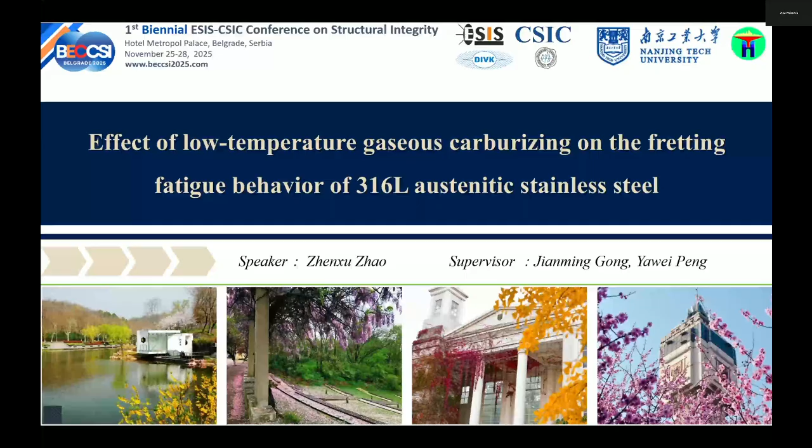Okay. Alright, please. Okay.

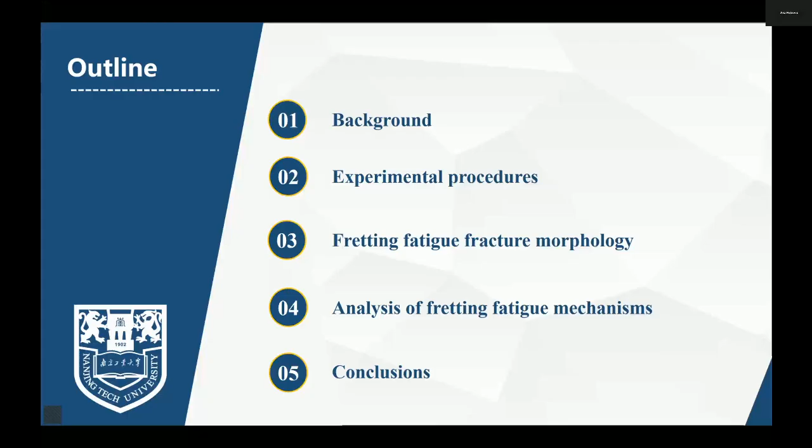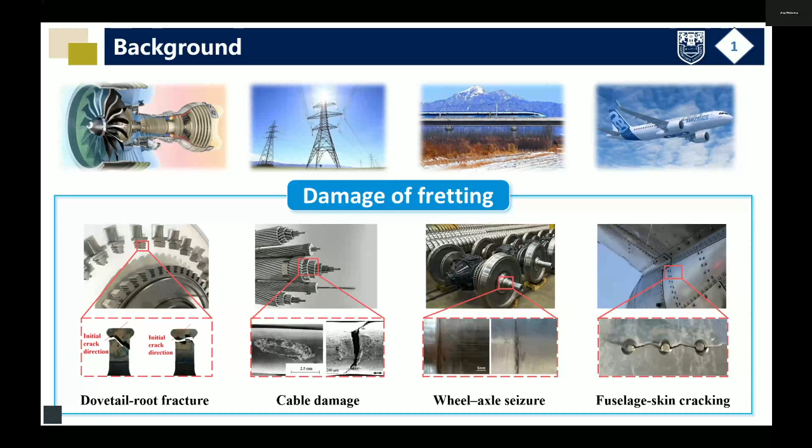Fretting is everywhere in our daily life and industrial production, such as in gas turbines, power cables, trains, and airplanes. Although the displacements are very tiny in fretting, the combination of contact pressure and repeated microsliding promotes severe surface wear, crack initiation, and even early failure. As shown here, fretting can lead to fracture, cable damage, wheel-axle seizure, and fuselage skin cracking. So, fretting damage is often described as the cancer of industry.

Fretting fatigue, as a typical form of fretting damage, is characterized by very small relative displacements, high concealment, and yet extremely severe consequences once cracks initiate. Fretting can shorten the fatigue life by more than 70% at the same stress level and reduce the fatigue limit by over 30%.

316L stainless steel is widely used because of many advantages, such as excellent corrosion resistance, high toughness, and so on. But its low surface hardness and low fatigue limit give it poor fretting fatigue performance. So, optimal surface hardening techniques are essential for enhancing the fretting fatigue of 316L stainless steel.

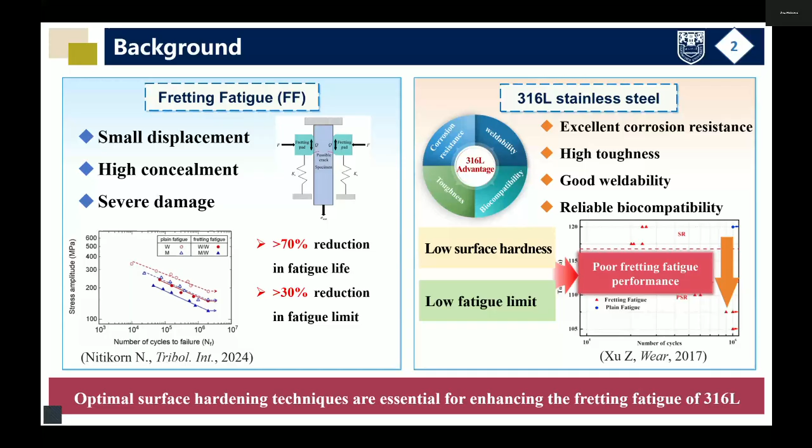Surface hardening techniques are usually divided into surface mechanical treatment and surface thermochemical treatment. However, surface mechanical treatments are difficult to apply to complex structures. High temperature thermochemical treatment can form carbides, which decrease the corrosion resistance of stainless steel. So among these, low temperature gaseous carburizing can improve corrosion resistance, increase surface hardness, and enhance the fatigue limit of 316L. So, the fretting fatigue performance of 316L stainless steel after low temperature gaseous carburizing requires further investigation.

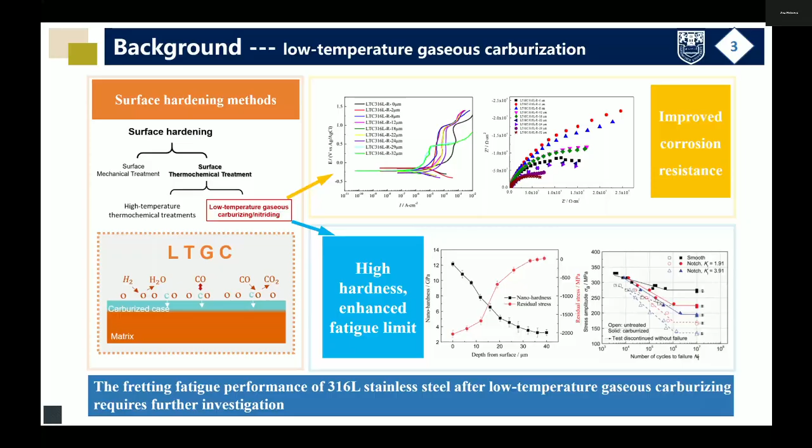This is the experimental procedure of my research. We carried out fretting fatigue tests using a bridge type fretting fatigue device. The normal contact stress was kept at 60 MPa. The loading frequency was 12 Hz, and the stress ratio was 0.1. Notably, the carburized samples were tested under the same conditions as the untreated ones.

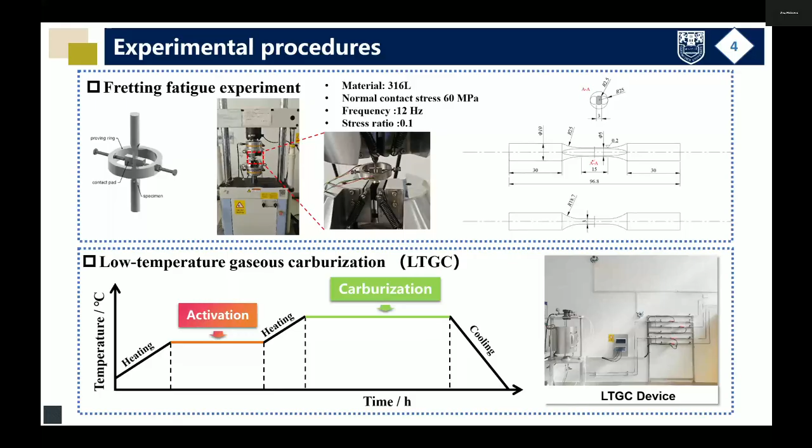The metallographic image shows that in the carburized sample, a uniform precipitate-free 30 micrometer hardened case forms on the surface. The hardness and carbon content show a gradient distribution, peaking at 12 GPa and 3.1 weight% respectively. Substantial compressive residual stress is introduced in the carburized sample, with 2.2 GPa on the surface.

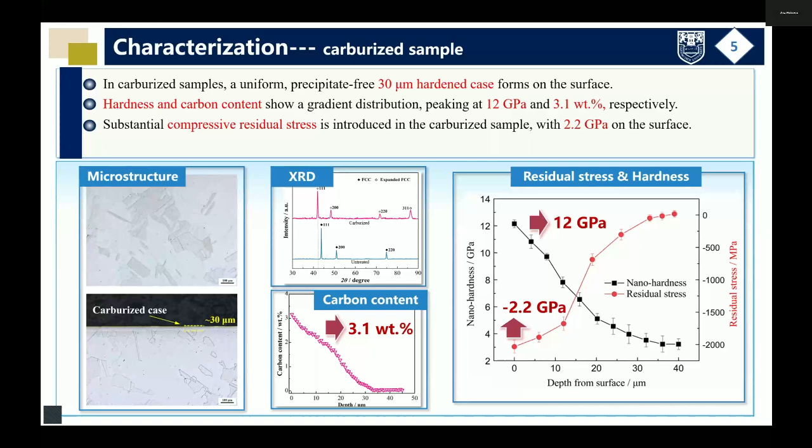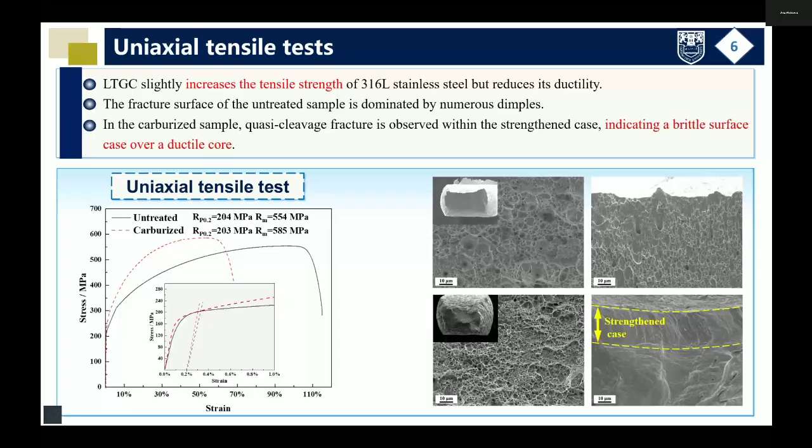Next, I will describe the results of the fretting fatigue test, starting with fretting fatigue life. The fretting fatigue limit of 316L stainless steel is 40% lower than its plain fatigue limit. LTGC leads to a 10% improvement in the fretting fatigue limit, and at high stress levels, it should be noted that carburized samples exhibit shorter fretting fatigue life than untreated samples. The cycles to failure graph on the right shows that with decreasing stress, the fretting fatigue life of carburized samples gradually recovers and eventually exceeds that of the untreated samples.

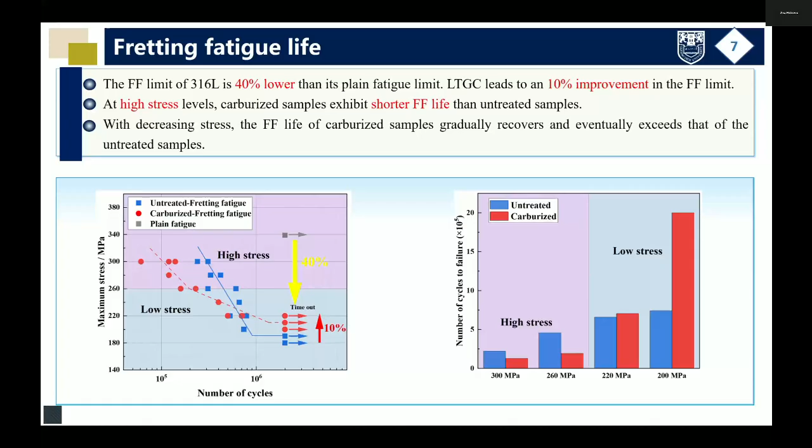Using SEM, we examined the fretting fatigue fracture morphology. All fretting fatigue fractures originated from the fretted surface of the sample. Fatigue fracture in the untreated sample initiates from the surface. In contrast, for carburized samples, as the stress decreases, crack initiation sites tend to shift from the surface to the subsurface.

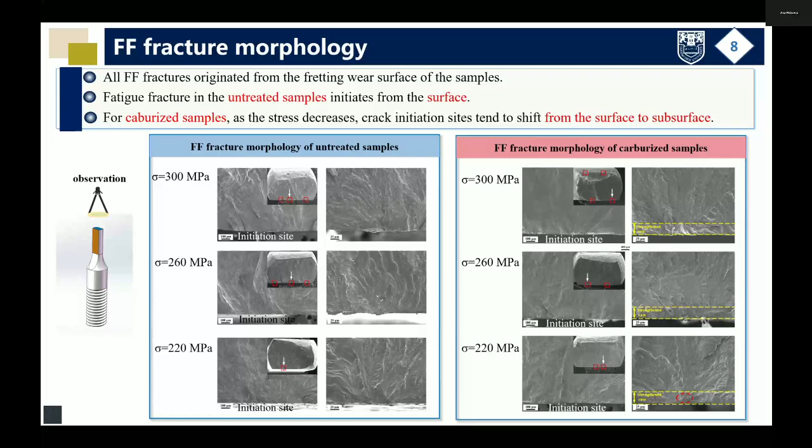Next, we examined the fretting wear surface by SEM and EDS. For the untreated samples, the surface shows severe damage. We can observe microcracks, ploughing, plastic deformation, and debris. In addition, EDS analysis indicates the presence of oxidative wear. So, the wear mechanism is governed by a combined action of abrasive, fatigue, and oxidative wear.

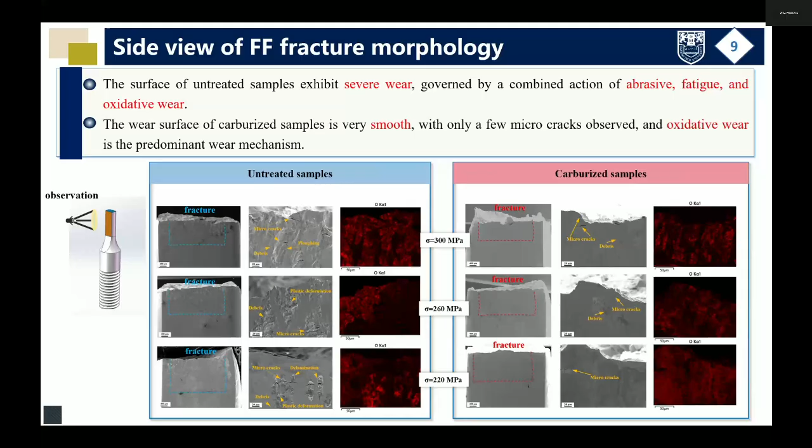The wear surface of the carburized sample is very smooth because LTGC forms a much harder surface on 316L stainless steel. Only a few microcracks are observed, and oxidative wear is the predominant wear mechanism.

The morphology of the contact pad is shown here. All contact pads were kept in the untreated condition and were not subjected to LTGC. The contact pad of the untreated sample also suffers severe wear, particularly in the mixed fretting region at the edge, where a combined action of abrasive, fatigue, and oxidative wear is observed. Owing to the higher hardness of the carburized case, more pronounced ploughing occurs on the pad, while the dominant wear mechanism remains similar to the untreated condition.

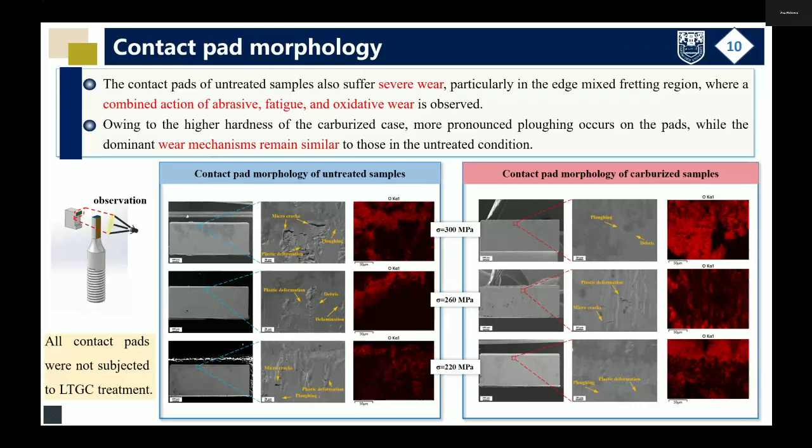To further understand why carburized samples show lower fretting fatigue life at high stress, we examined the surface features of carburized samples after different stress levels and measured their residual stresses. The result shows that at high stress, initial cracks form directly in the surface of the carburized case, which means damage is already introduced during the first cycle of fretting fatigue.

On the other hand, residual stress measurements indicated that although the compressive residual stress is not completely relaxed after the first cycle, the residual stress in the fractured sample turns into tensile stress, which is harmful to fretting fatigue. So, at the high stress level, the reduction in fretting fatigue life after LTGC is mainly attributed to cracking of the carburized case and relaxation of the surface residual stress.

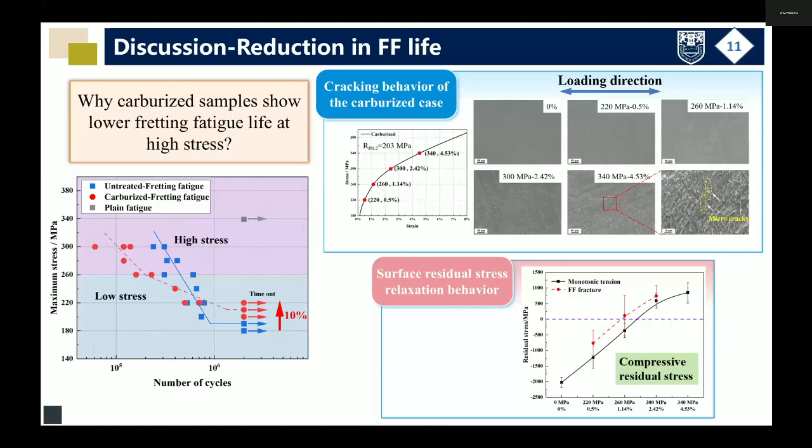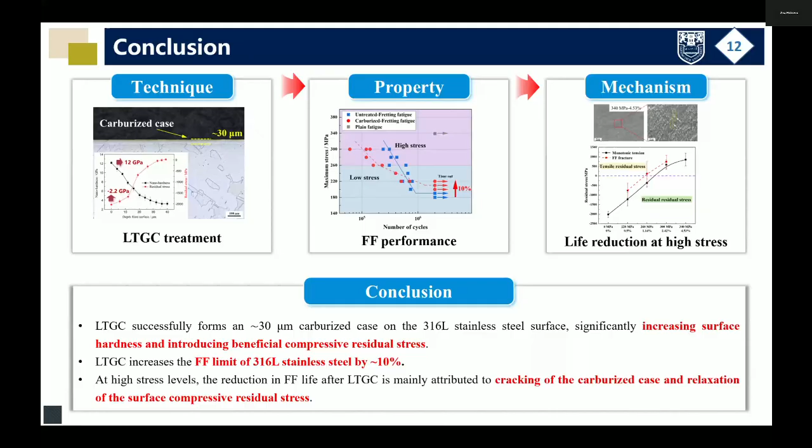Next is the conclusion slide. LTGC successfully formed a 30 micrometer carburized case on the 316L stainless steel surface, significantly increasing surface hardness and introducing beneficial compressive residual stress. LTGC increases the fretting fatigue limit of 316L stainless steel by about 10%. And at high stress levels, the reduction in fretting fatigue life after LTGC is mainly attributed to cracking of the carburized case and relaxation of the surface compressive residual stress.